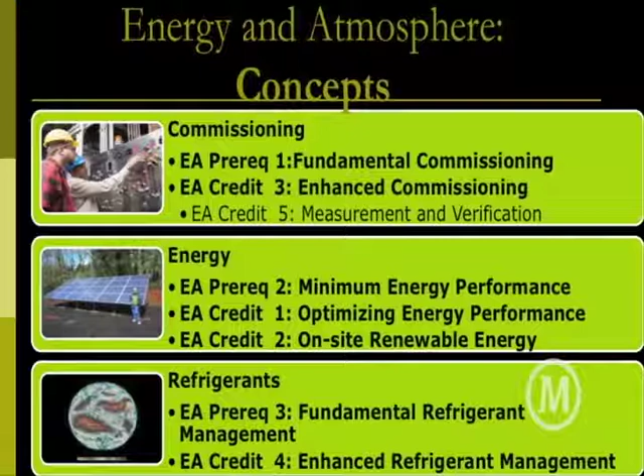There is a point, or there's many points associated to optimizing energy performance. We looked at that credit weighting, and we'll get into it again, but that's where those 20 points slide, where you get halfway to certification with one credit. On-site renewable energy is heavily weighted as well, important for the future. And refrigerants - refrigerants are something that really have been overlooked and are very harmful to our ozone layer. So we'll look at that as well.

So commissioning, good definition - very important to sustainable design, because this is really making sure that the systems we spec, how we design the building to be operating, is actually set at its optimal settings and actually installed in the building correctly, is actually reacting to how the occupants are using the building.

Definition: the process of verifying and documenting that the facility and all of its systems and assemblies are planned, designed, installed, tested, operated, and maintained to meet the owner's project requirements. So once again, something that you have to address early on. The owner's project requirements are something you need to do ideally in pre-design, where you sit down with the owner and really set these goals so you can get the team to stand behind it with their own basis of design that then gets checked and adapted throughout the process.

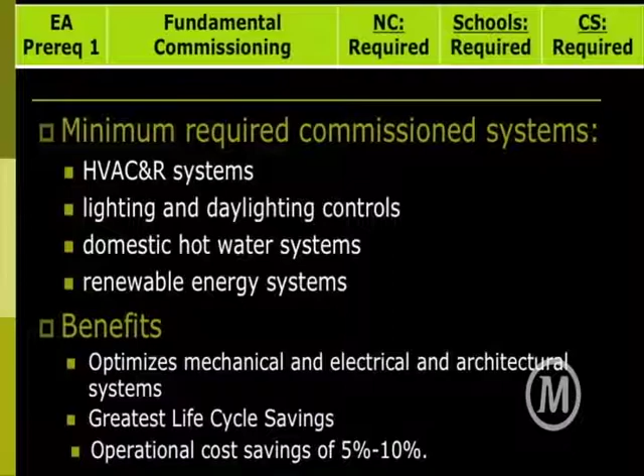That's essential and actually required of every LEED project. So fundamental commissioning, you're looking at HVAC, lighting, domestic hot water, renewable energy if you have it, at a minimum. And there are a lot of benefits of this. This is one that can have some upfront costs, but operation cost savings have been estimated at about 5 to 10% by some case studies and people reviewing it. So there's a lot of things that can happen - you're basically just setting your systems to run at their optimal point.

Minimum energy performance is important as well, because this is a prerequisite. It's required for every LEED building. This is an important standard to know. We're talking about how to verify these systems - so how do they compare to ASHRAE standard 90.1? This has now changed to 2007. This is the updated version since the last version of LEED.

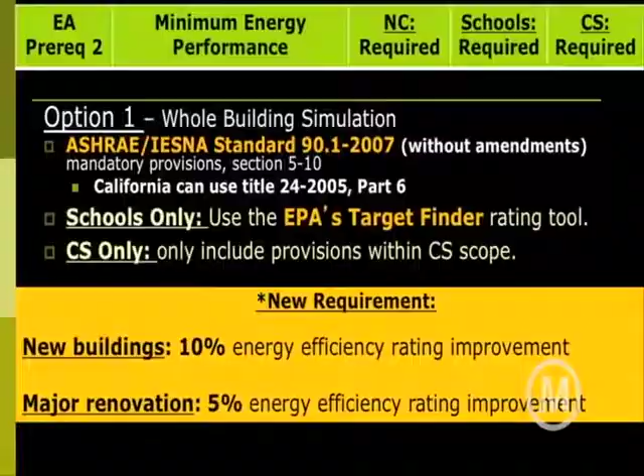California Title 24 is a more stringent code, so you'd actually want to compare against that if you're in California. And schools can use EPA's Target Finder. So this is new, that just meeting the standards isn't enough. According to LEED, you have to improve new buildings by 10% - they have to be 10% more energy efficient. And major renovations, remember that's an option for new buildings if it's a major renovation, not just the systems in the envelope - it is actually a 5% improvement against code.

If you're a core and shell building, you have to only improve the systems that are within your design control.

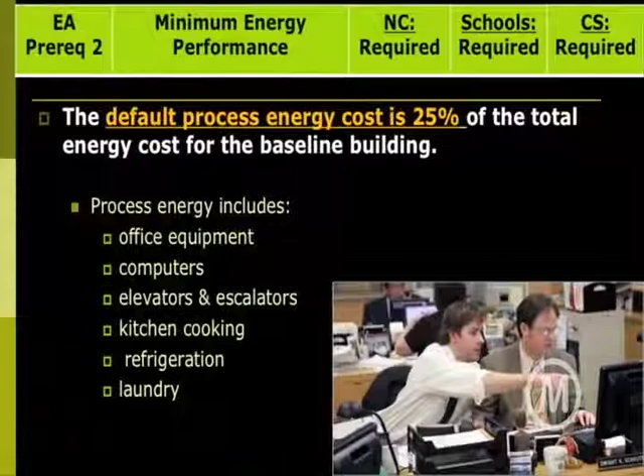Default process energy costs - so you don't have to calculate everything yourself if you're using the LEED rating system. It's a good gauge of some approximations that help inform design. So according to LEED, default process energy is 25% of the total energy costs of the baseline building. So instead of having to calculate how much you think office equipment is going to be - computers, elevators, refrigeration, laundry - it's letting you estimate it. So you don't have to predict all of those different factors.

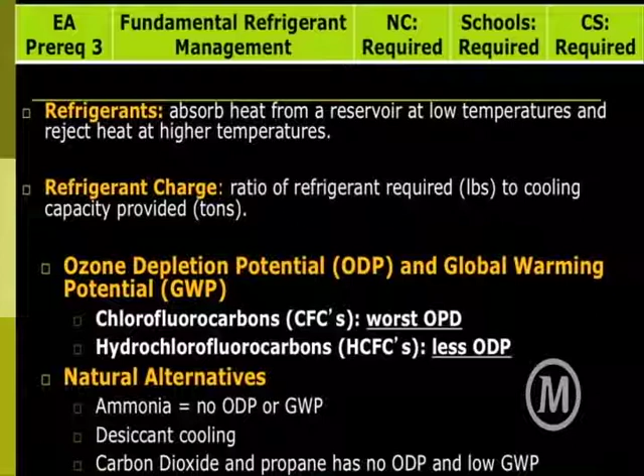We talked about refrigerants being important, so fundamental refrigerant management is a requirement of LEED. Refrigerants are what's running our HVAC system, so they're all around us all the time. There's a lot of harmful ones out there for us in the atmosphere. CFCs are the most harmful - those are now outlawed in the US, but our old buildings have it, so it's good to address that when you're retrofitting a building. Those are chlorofluorocarbons - that has the most ozone depletion potential, ODP. Hydrochlorofluorocarbons are a close second, but not yet outlawed.

So natural alternatives, thinking about other ways we can do it - maybe ammonia has no ODP. Desiccant cooling, carbon dioxide, and propane have low levels.

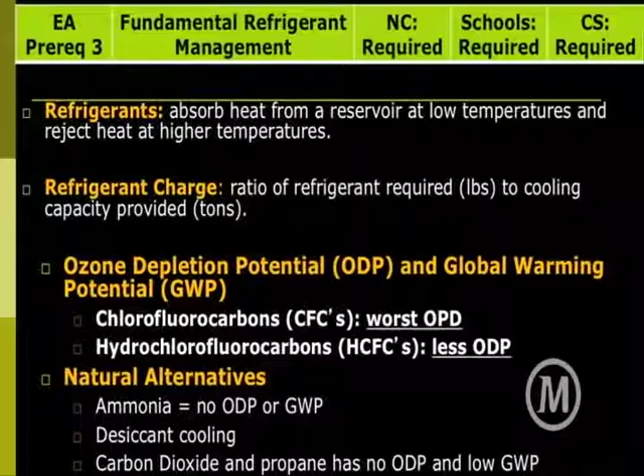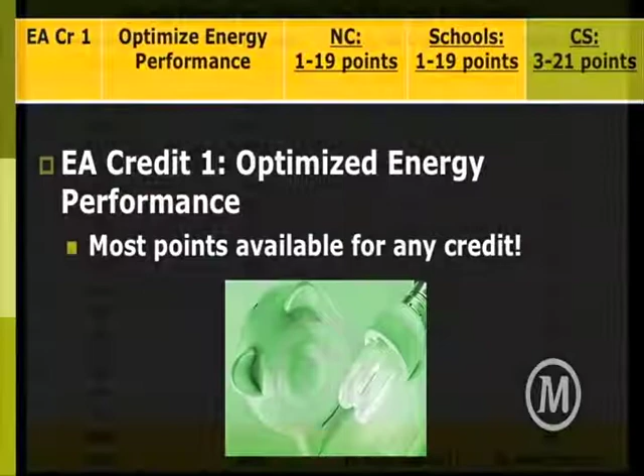Optimizing energy performance. Here is a huge opportunity for cost savings, and a huge degree of where you can earn points. You can start at 12% more efficient than code and earn 1 point, and the more efficient you get compared to the ASHRAE 90.1 standard, the more points you get.

At 48% more efficient than code, you get 19 points. The Burnside rocket we were talking about, with the edible garden, uses a geothermal system and other innovative ideas, looking at the building as a system. They're saving 50% of their energy, so they're saving every month on their energy bills. I'm sure they got lots of incentives associated with that too, and they got 20 points total adding in that innovation point.

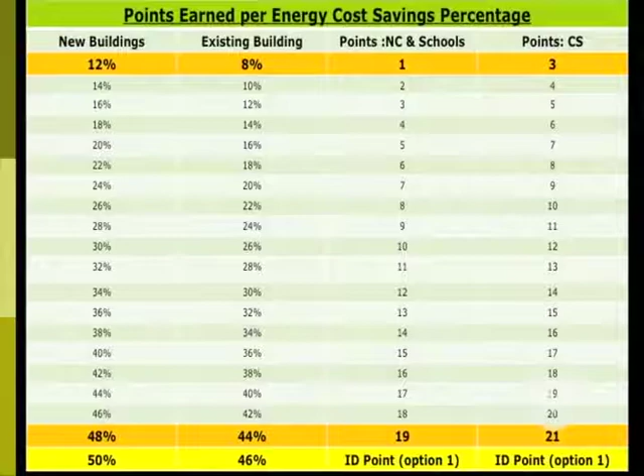So energy is very important. That's illustrating the weighting system that got addressed in LEED 2009.

First, you want to reduce demand. That has to do with your building orientation on site and how you're maximizing opportunities for solar gain, blocking direct sunlight, letting in indirect light. There's a lot of design things you need to be aware of in how you're oriented on site. Maybe natural ventilation is an option - you want to look at which way you're getting the most wind.

Harvest free energy - using things like passive heating and cooling, maybe a concrete floor that absorbs sunlight coming through your windows and releases it when it's colder at night, things of that nature. And increase efficiency - here we're talking about systems, the mechanics of the building more.

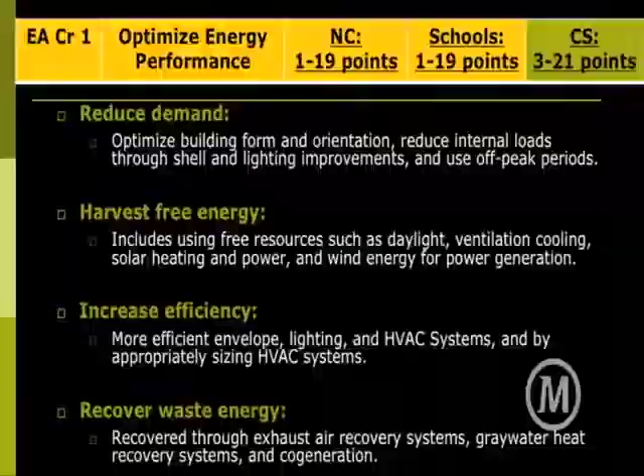Recover waste energy. If you're supplying more ventilation into your building - a good thing, better air quality - but maybe that requires more energy, you want to do a heat recovery system. What that does is the heated stale air exhausting from your building preheats the fresh air coming in. It never touches - it does a little loop and comes in just a bit warmer, requiring less energy to get it to that level for the indoors.

On top of those strategies, you want to start looking at renewable energy opportunities to supply clean energy technology, because the price of energy is going to continue to go up. So why not manufacture your own?

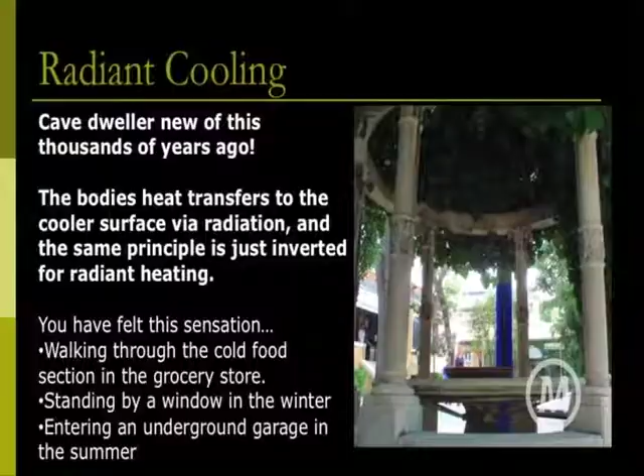Radiant cooling - cave dwellers have realized this forever. Basically it's what we experience when we walk through a grocery store and go by the freezer section and feel cooler - it's because your heat is actually being emitted to that cold surface through radiation. It's a very efficient way to do things. Radiant heating in a floor is much more efficient than heating the air, especially from the top down. You actually feel that sensation because you're balancing out with the temperature of the other surface - if it's cool, you're getting cooled down by it, if it's warm, you're getting warmed up by it.

Solar thermal, PV, wind, geothermal heating, biofuel, wave, and low impact hydro are all renewable systems.

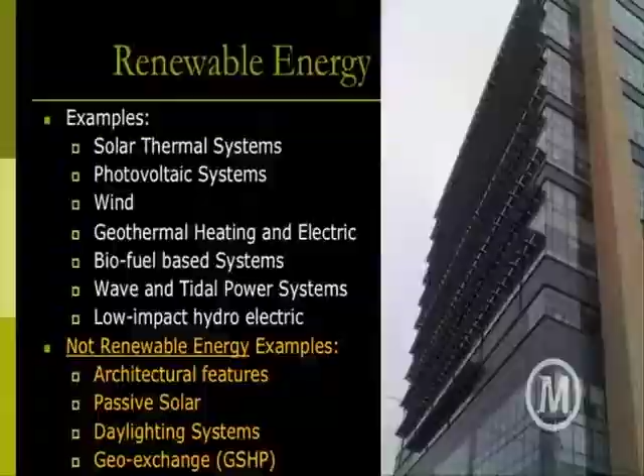Note that if you're talking about passive systems, architectural features, like passive heating, daylighting, or geo-exchange, these are not actually renewable. They're not producing energy, and that's what defines renewable energy in the LEED rating system. GeoExchange is different from geothermal heating and electric, because all you're doing is using the Earth's constant temperature a few feet underground to preheat or pre-cool air or water going through the building. You're not producing energy, so even though it helps a lot with energy efficiency, it's not renewable.

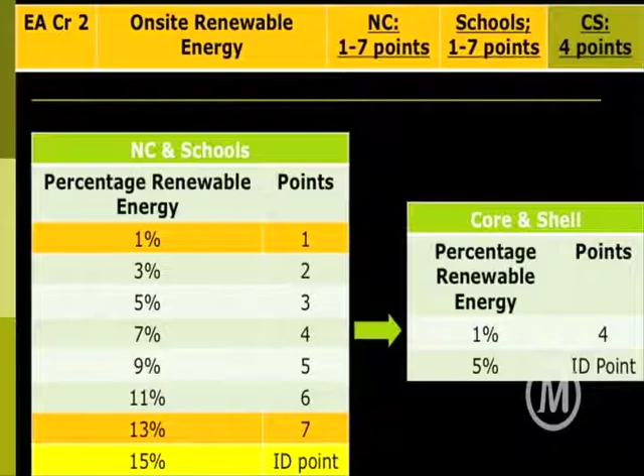Here's an idea of how many points you can get in the LEED rating system, up to 7 points, 8 with the ID point, for 15% of your annual energy use being supplied by renewable energy, as a percent of the building's annual energy cost. That's what you're comparing against. Once again, it's supplying measurements for us to do these high performance buildings. It's based on energy calculated for either Energy and Atmosphere Credit 1, optimizing energy performance, or you can use the Commercial Building Energy Consumption Survey, which is a great resource giving typical averages of how much energy different building types use per square foot. Just a great starting point.

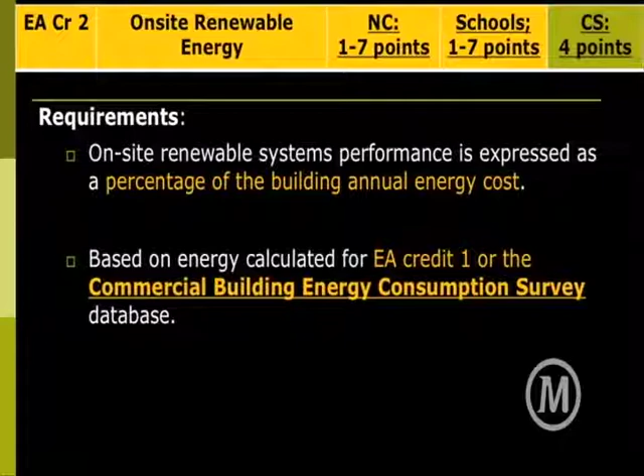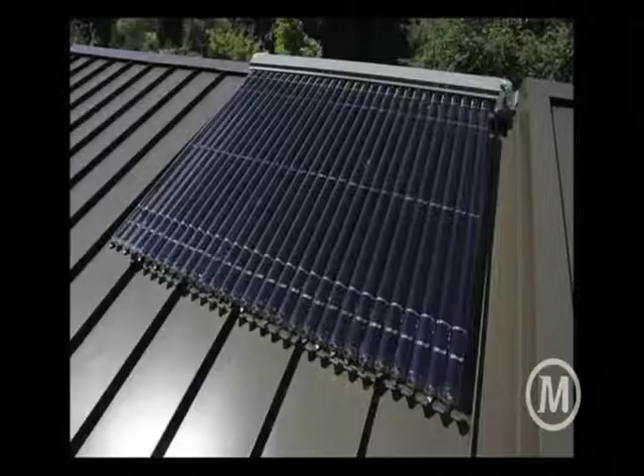Evacuated tubes, solar thermal, pool heating. This, with incentives, is very cost-effective. Kind of one of those no-brainers, if it's done right, once again.

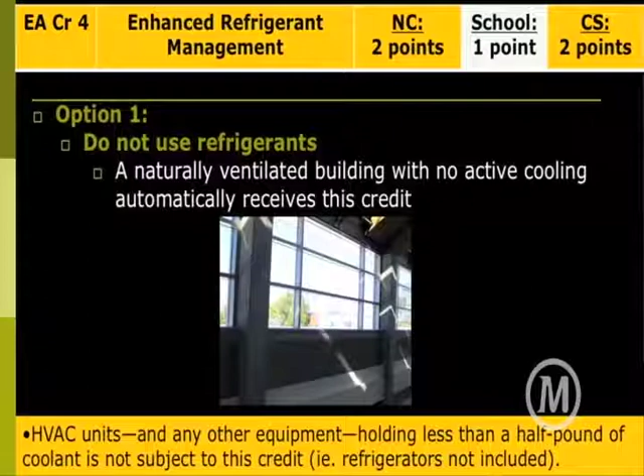Enhanced refrigerant management. So looking at synergy again: natural ventilation is good for humans, good on the social aspect, good on the economic side of things, because you're saving money not having to heat and cool mechanically, and you're also reducing refrigeration needs because you don't need it for naturally ventilated buildings. So you're saving that headache of trying to find refrigerants that don't have ozone depletion potential or global warming potential. This is an image from the Kelly Engineering Building, showing a vent on the top of the central area. It's venting warm air out the top because warm air naturally wants to rise - the stack effect. They vent that out and it's naturally cooling itself. In this climate, that's very doable - 80% of the time we can be bringing in fresh air way more than we do.

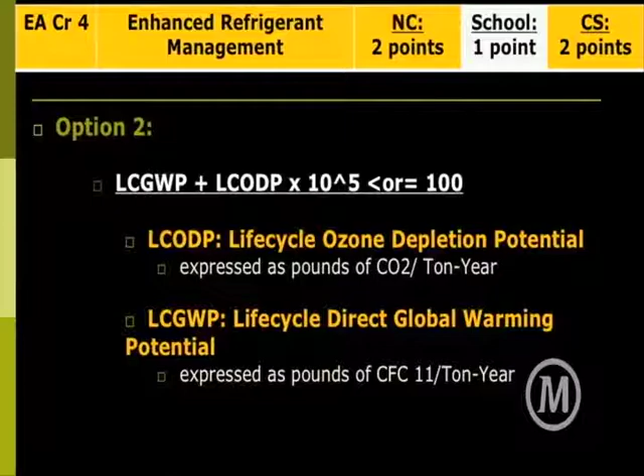So this is the ugly calculation that comes with this credit, but you get 2 points for it. Really, the point of this is you need to reduce life cycle ozone depletion potential - that's what LCODP means - and life cycle direct global warming potential. So one plus the other, times 10 to the 5th, lots of zeros, has to be less than 100. So you get the picture - you can't have much at all to apply for this credit. You have to be very responsible about the refrigerants you're choosing.

Here's an example, a case study: the Hawthorn Fred Meyers. Fred Meyers has really taken initiative to start implementing some of these sustainable strategies, and they're looking at the data, informing themselves about what's working best in their buildings. One of their pilots was Hawthorn, because the culture of that community really supported it - they're very environmentally conscious, they appreciate the effort, and that helps with their sales. So you're reacting to the community you're in, you're doing good for the environment, and it helped their bottom line immensely.

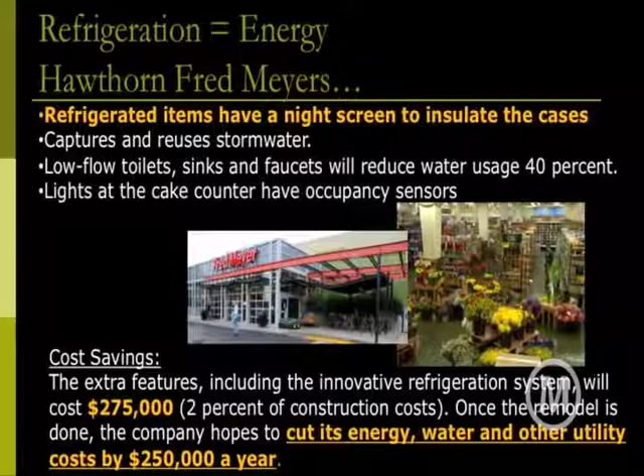You could see from capturing stormwater, putting night screens over their refrigerated produce, low-flow toilets, sinks and faucets, and having occupancy sensors on things like the cake counter that don't have to be on all the time. Through all these different strategies, they spent $275,000, but they save $250,000 a year. So they're thinking, this may be a good idea - if we do this on a mass scale, imagine the savings. That's really my hope in general - this is really where we're going to make an impact. If people start catching on to all these benefits, we're going to see this on a level that actually makes some really positive changes.

This is a great product for many applications, with high recycled content in this flooring, but it's bubbling up because it wasn't durable enough. It didn't take into account big crates and things being hauled over that floor in a big retail store, so it's having maintenance issues that are going to cost. That's why integration, looking at the standards and looking deeper, is really important.

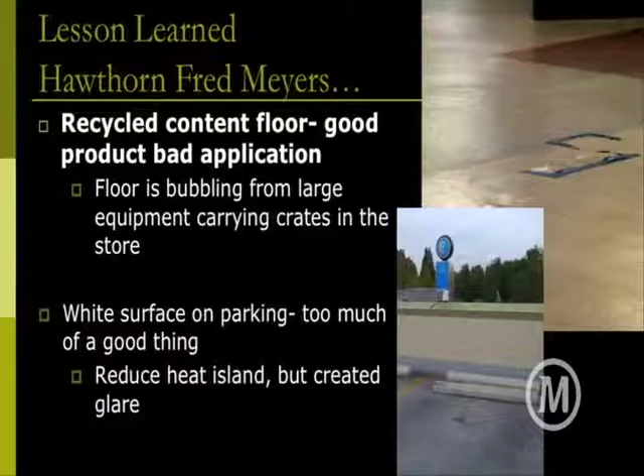Here we see an electric car refueling station. They have this white concrete. This is a cloudy day, but with any amount of sunshine the parking is so light it's almost blinding white. They did a good job with being reflective and reducing heat island effect, but did they need to go that far? Because it's difficult to be walking through that parking lot, from what I hear from the facility managers and some of the people who work in the store. So you have to weigh your options and be responsible, not just go to the extreme because somebody said it was a good idea.

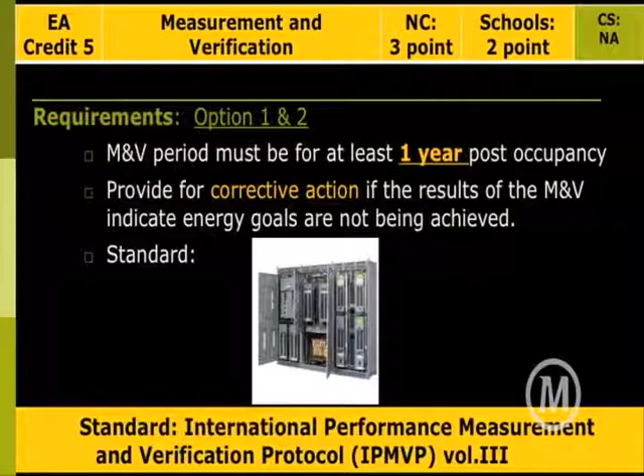We have to be informed about our decisions, be sensible. Measurement verification is important. Those energy models, as I said, can only do so much. They're a great estimate and great for informing design. It's important to do them early on in the process so you can weigh options—that's when an energy model really has the best savings and impact on your project. But afterwards, you need to go back and look at how the building is actually functioning, what the data shows, how occupants are using it, and then take corrective action. Here the standard is the International Performance Measurement and Verification Protocol, IPMVP. A good way to remember this standard relating to measurement verification, MV, is right in the acronym. That's the only way I remember these things—you've got to find little tricks for yourself as you get more familiar with this stuff.

Green power—so we talked about renewable energy on site. Green power is renewable energy on a utility scale: provide at least 35% of the building's electricity from renewable sources by engaging in at least a 2-year renewable energy contract. So if anybody says, hey, can you just buy LEED points—not really, and not a good idea. But this one, you kind of are investing in renewable energy. That's great, that's how we're going to push these things further with new technologies. But this is actually just buying a contract with a program that's either selling green-e products, which could be renewable energy certificates, something you buy and sell. The stock market is actually kind of picking up on this new commodity, so this is a real deal that's going to be part of our economy, at least predicted to be.

Center for Resource Solutions, CRS, is a good resource for these different options—green tags, tradable renewable certificates, all different ways to buy and sell this commodity.

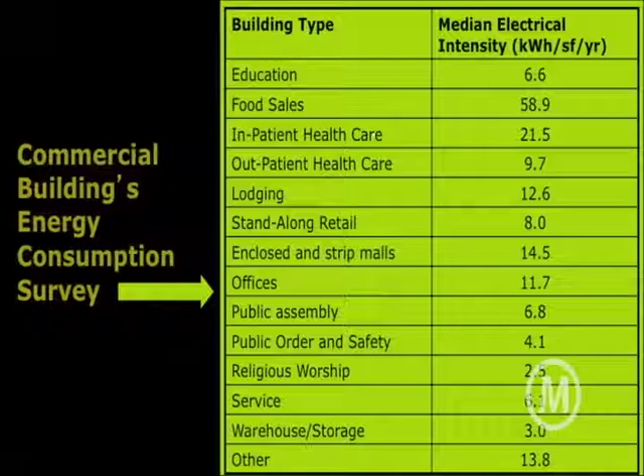So once again, you can look at the Commercial Buildings Energy Consumption Survey, which is a collection of a wide range of data collected in U.S. buildings showing on average how much these types of buildings use per square foot. Or you can use your energy model, the one you use for energy optimization points. This is why Fred Meyers could get so much bang for their buck by being more energy efficient—this data from the Commercial Buildings Energy Consumption Survey shows that food sales have the highest median electrical intensity, in kilowatt hours per square foot per year, of any type of building. So if you look at something like that, it's good to look at the resource first and realize energy efficiency is probably the first thing you should look at, because you're likely using a lot.